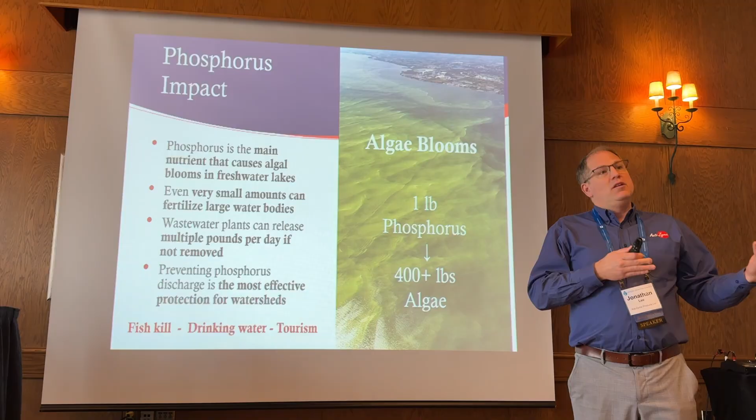Why this is such a big deal is that phosphorus doesn't gas off like nitrogen, right? It's a macronutrient, meaning it just stays — it does not easily break down. That's why most wastewater plants have major issues with disposing of it, and that's why the limits on them are so low, because we don't want phosphorus entering the waterways.

So these are the limits, the regulatory requirements, milligrams per liter across the country. The interesting part here — I'll talk more about Alberta — but you can see it ranges. Manitoba has the strictest requirement, and almost every single system in Manitoba has a requirement as part of their permit to remove phosphorus.

But in Alberta, there's actually only about 40 sites that have phosphorus limits. They're looking to increase that, and more so they're focusing in on very targeted areas where the watersheds are really critical, where the addition of phosphorus will make a huge impact. So they're going to start there, but they're going to be expanding, and I can see in the next 5 or 10 years everybody having one, because in Manitoba, Ontario, BC — everybody's got one.

Saskatchewan is in a similar boat as Alberta — there's just a few sites that have it. I think it's just taking time to get to the central part of Canada, because all those other areas are all connected to major lakes, major bodies of water. Eventually it'll come here and we're going to have to find a solution.

Because as you'll see here, biological and chemical methods are not the best way to go about it. Biologically, you need living organisms — that's actually where Acti-Zyme is primarily in, biological treatment. So we know the weaknesses and the strengths.

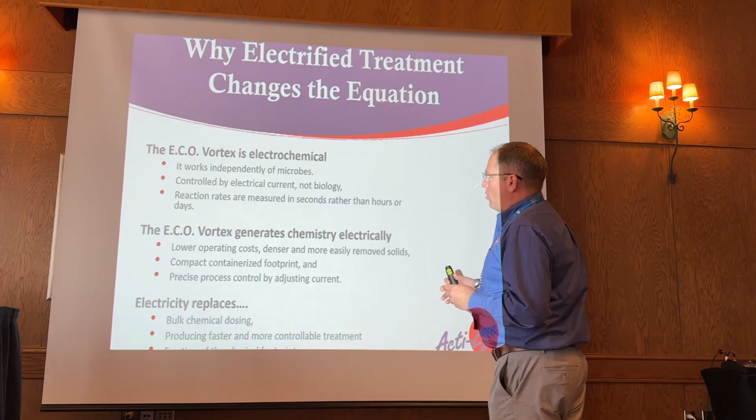E.C.O. stands for electrical chemical oxidization. There are three main parts to this: first, the coagulation part. What happens is it requires electricity, and that electricity then reacts within our cells, which I'll show you a video of in a second.

When it's in those cells, it releases ions that are able to bind. You get faster reaction times, within minutes and seconds rather than biological lengths of time. It's also not sensitive like biology - biological processes are quite sensitive to temperature and other conditions like alkalinity. That's why it's able to have the benefits without the limitations of biology.

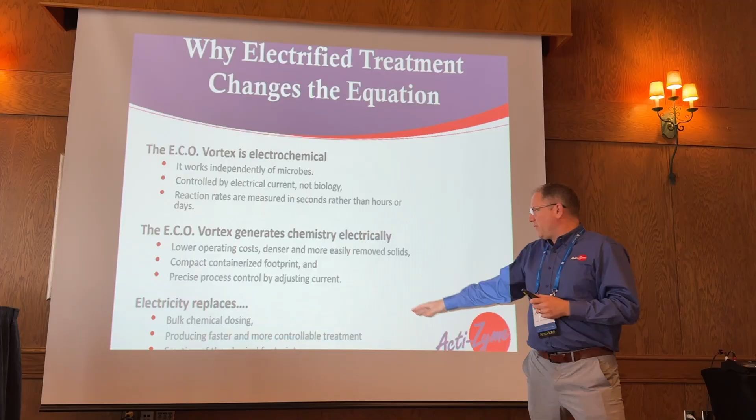The whole point is to lower operating costs and not be reliant on chemicals. Right? We normally put things like this into the chemical category, but it's a natural process. We're all focused on natural methods to remove and solve wastewater treatment problems without major costs - essentially the electricity replaces the bulk usage of chemicals.

We can design systems that can handle not just phosphorus and ammonia, but all sorts of other things as well. This is just the first target because phosphorus is so prevalent and everywhere. We're going to be looking to expand to other metals and other things in different areas, like manganese, but phosphorus is the main one we're focusing on for now.

Our whole grant, our whole process started about a year and a bit ago. We started contacting Alberta Innovates, and they were able to grant us some funds for this project. That happened in September. The whole length of the project is 12 months, and the first few months were the development of the system.

We custom designed our complete whole system, but we've been doing the research for many years to try and do this. We had a pilot at the beginning, a really small scale one, and now we're at a full scale system. That's the first part, the 12-month process.

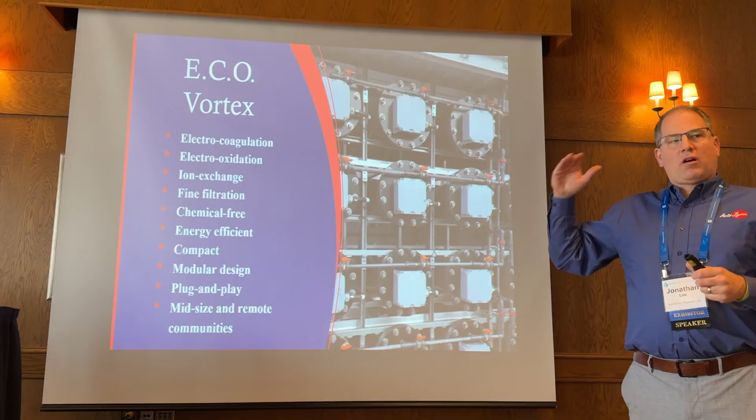This is a little short, about 30 seconds, just a quick tour so you can see what it looks like.

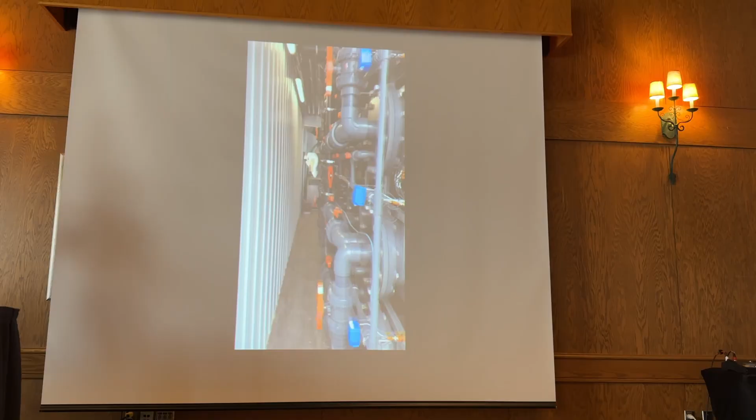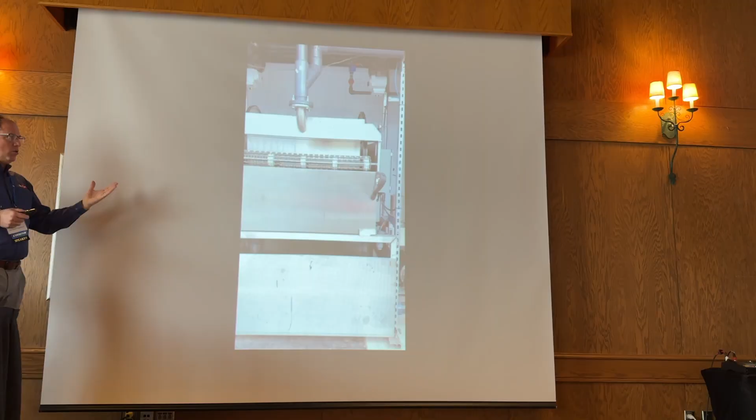So the front of the control panel. In here are 24 cells across two different phases of electrical cells, along with all of our rectifiers, control panel, and breakers. Those are all the different 12 cells. And this is the opposite side where the electrical side ties into all the anodes and cathodes in every single one. Then we have two micron filtration systems that strip out everything that goes in beforehand, as well as where the reaction takes place. And it all fits within a 40-foot container.

So phase one is the most important, which is the electrical coagulation. We have an electrical current that goes from our rectifiers into each individual cell. It goes through the metals, reacts with them, releases ions, and creates those flocks.

Then those flocks bind with the phosphorus, developing an insoluble phosphorus solid called pin flocs, tiny things that can then be filtered. That process is way more efficient at removing phosphorus, and as far as volume, it's about 80% less chemical usage than alum. The amount of sludge produced is minimal compared to any other process, and it's more efficient because it produces the same type of effect that polymers would create, but without chemicals.

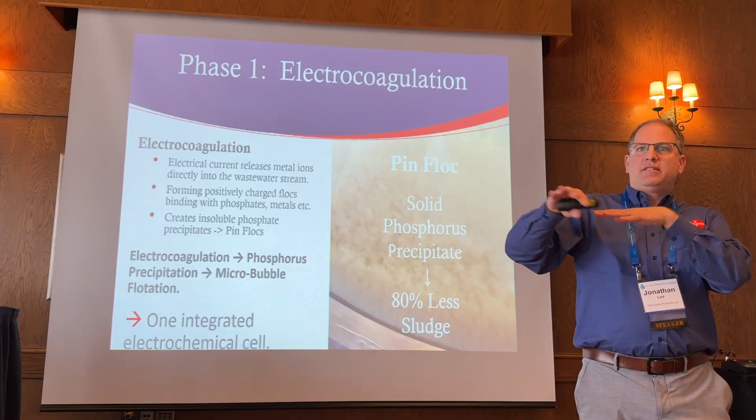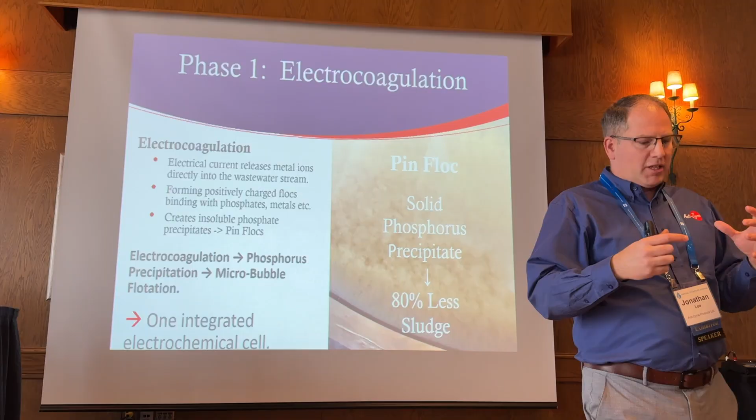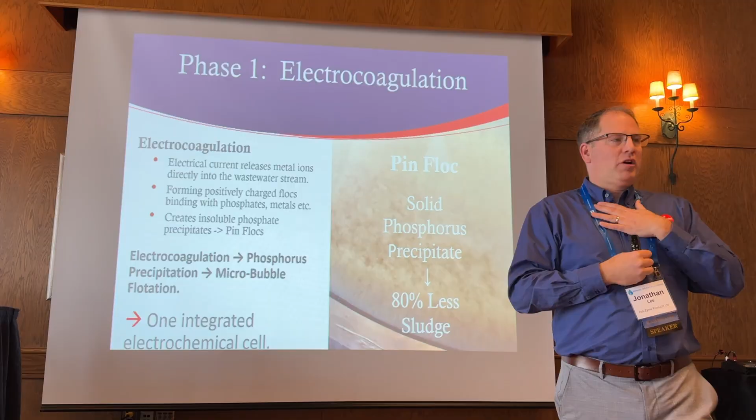We're actually creating it in situ inside of every one of the Vortex cells. All of this is done through it. Then at the end, as these electrodes function, they also produce micro bubbles releasing oxygen and hydrogen, which move the process along and carry those particles and flocs attached to the phosphorus out through the system for filtration.

The second process, the other 12 cells, is electrical oxidization. This is where we generate reactive oxidizing agents to break down and destroy organics, as well as E. coli and other harmful pathogens. It goes through these pipes, through the process, and actually creates hydrogen peroxide naturally in the system, basically cleaning and sanitizing the water after the first process.

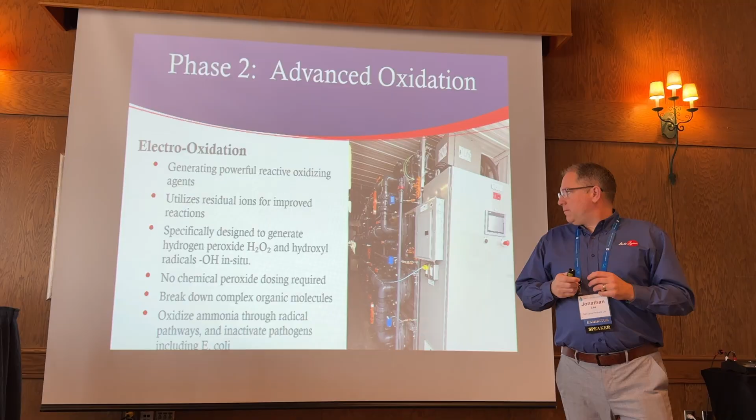There are no reagents added, so you don't have to add any kind of peroxide to it. It's created through our custom designed anodes that we've developed. And with these oxidizing agents, it reacts with nitrogen and is able to reduce it. Those are the two main processes.

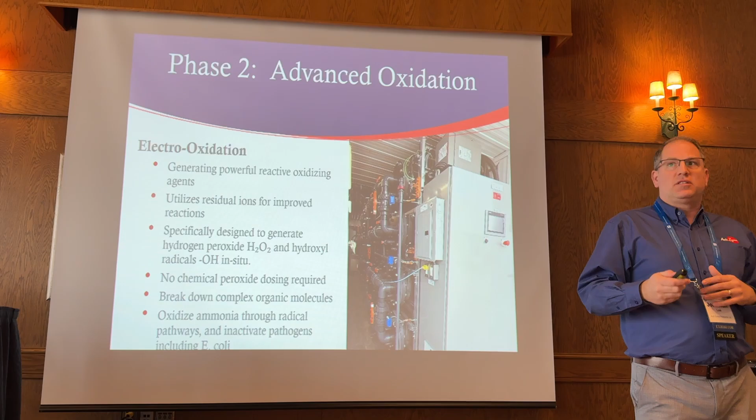In between those are all the filtration steps. We send the water through the first filtration to remove 2 microns of everything, so before it even hits the system, it's already pretty cleaned up. After the electrocoagulation process, it goes through the same filter again to remove as much phosphorus as possible. From there, it goes to the second process for oxidization and sanitation of the water, and final oxidization of the ammonia and BOD. Then it goes to the last filtration step, where remaining TSS and any phosphorus not removed earlier is taken out at the very end.

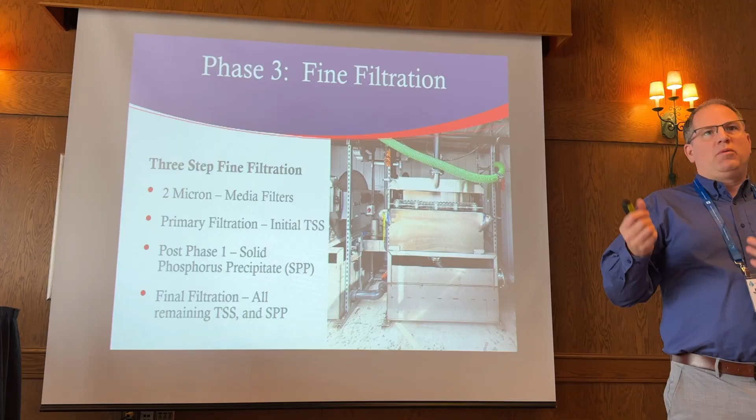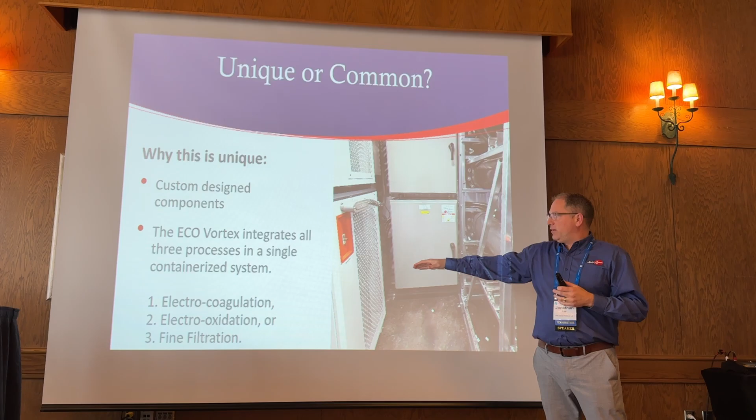So why is this unique, or why would someone consider looking at this? Nothing else out there actually exists like this. This brings multiple different technologies together within a very compact process. It's compact, able to produce all three of the main things: electrocoagulation, electrical oxidization, and fine filtration, all within a 40-foot shipping container, which hasn't ever been done before. It's all because of the specifically designed components we've developed that are able to react with electricity and provide the solution we want.

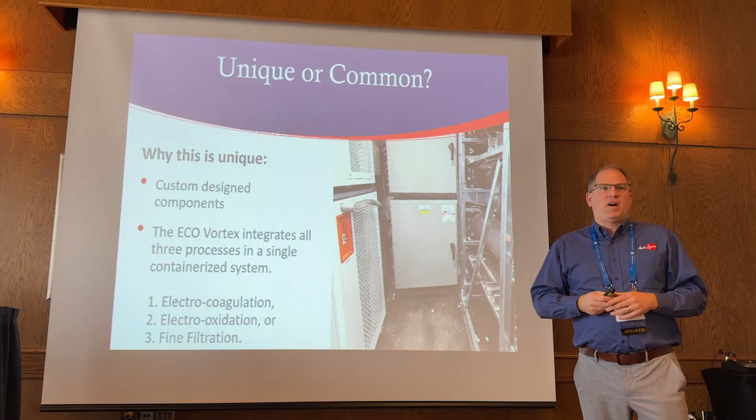So we went through and developed a comparison of all the other technologies or methods of dealing with phosphorus, right? You have your lagoons, your enhanced biological phosphorus removal, and then your membrane bioreactors - those are the main ones on the market.

And as you can see here, the cost is actually right in line as one of the cheaper alternatives. This is over a 10-year life cycle and per cubic meter, so it's a very fair comparison when you break it down that way.

But even with that aside, when you move on to the next things, this footprint is really small. This can be added to any process in any system when it wants that final polishing process to remove phosphorus and the last bit of organics and ammonia.

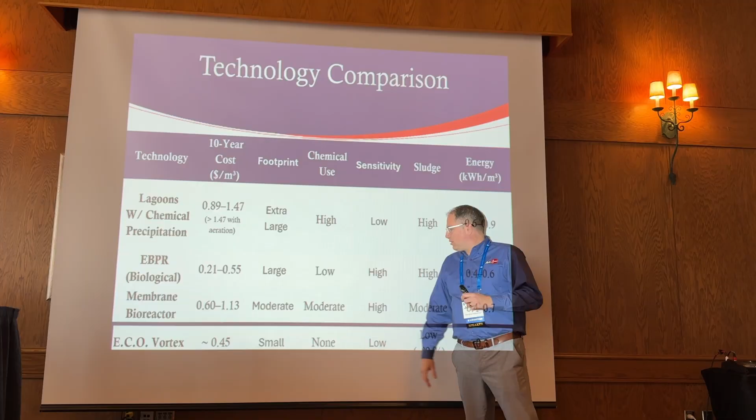No chemical usage. It's actually also not sensitive - you don't need to be as careful as with biology in the reactors or lagoons. This happens directly, so it could be cold weather or warm weather. It's all electrically controlled through current rather than biological activity.

The sludge, as I already mentioned, is the lowest of all of them. And we already know how difficult it is to remove sludge - all the permitting, disposal, transportation is dropped down significantly so you don't have to do as much with sludge.

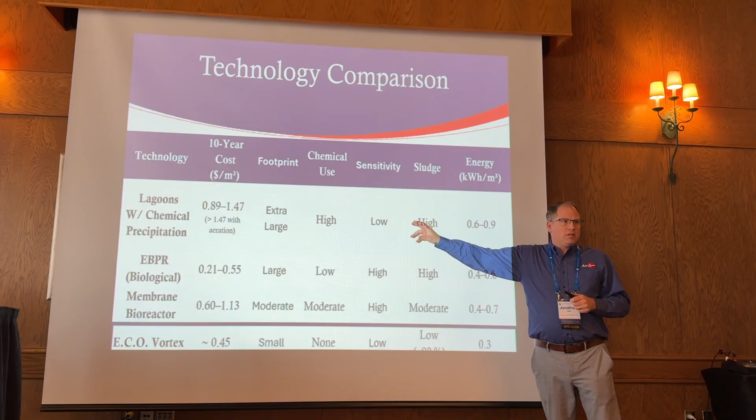And then at the end is the energy consumption. In lagoons, you don't normally think of energy consumption, but that's based on aeration, as most lagoons are required to have aeration in other provinces. Alberta doesn't have a major requirement, but BC makes it mandatory. More and more are saying you have to add aeration to your system if you don't currently have it - when your permits renew, that's often a large recommendation. So when you compare it against that, it's still cheaper than aeration, but then it oxidizes the water and strips out phosphorus and ammonia more efficiently than aeration would, as well as adding all the chemicals to do it.

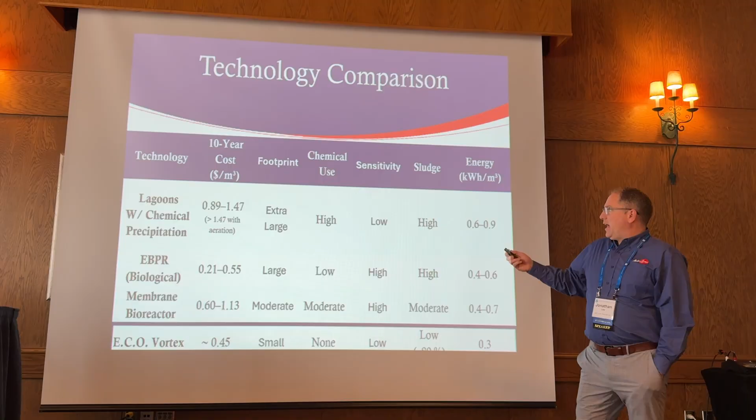So as a use case, the process has to be located after some kind of primary settling, right? The system's not designed to take on all the heavy sludge at the very beginning - that would be too difficult to handle. So you put it right after, like if you have a lagoon system, after anaerobic cells, or if it's a wastewater plant, after the first primary clarifier where the original solids are stripped out. This can then handle the rest.

Or it could be done at the very end of a process to discharge through, or recirculated at the very last cell just to strip out phosphorus completely.

And these are some of the expected performances based on the results we've had so far. So what we've done, like I said earlier, is had smaller versions of these to do some different prototyping, and that prototyping has allowed us to get better and better results.

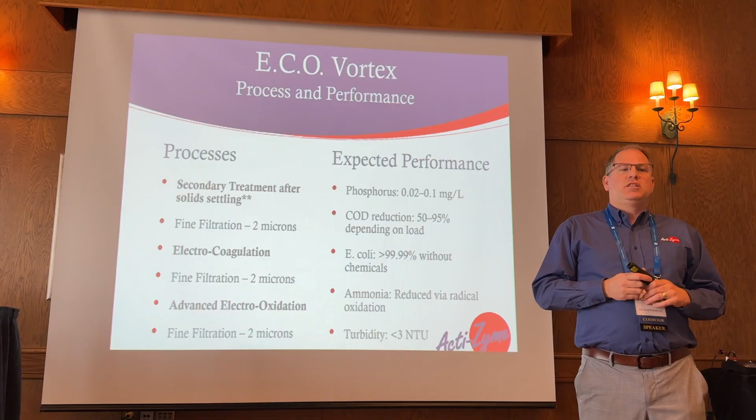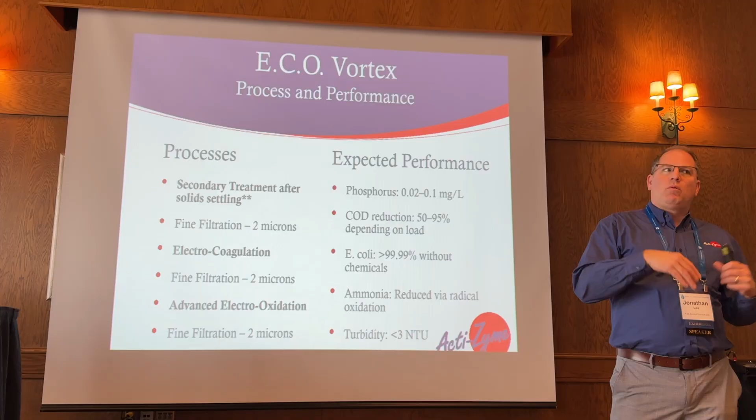So the impacts on water are pretty self-evident. If you can remove phosphorus at a high percentage level, then you won't have algae - if there is no phosphorus, there are no algae outbreaks. So we can remove it. If it just sits there and runs consistently at the end of one cell and recirculates the water through, it will eventually take all the phosphorus out over time.

Reducing chemicals, right? I'm of the opinion, always have been, that we want nature to be natural. We don't want to keep adding non-natural, non-biological things into the environment. And we want to be able to do so without impacting the quality of water we have. We have some of the best water in the world in Canada, so we want to make sure we maintain it as best as we can. Be good stewards of our water.

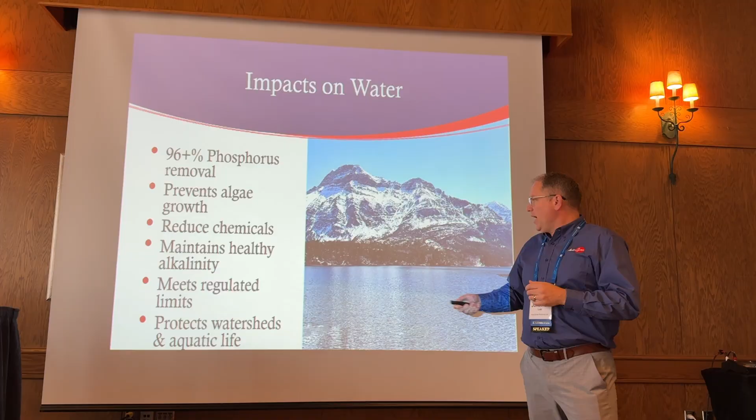It maintains a healthy alkalinity, right? This will meet all regulatory requirements. And then it will obviously protect our watersheds.

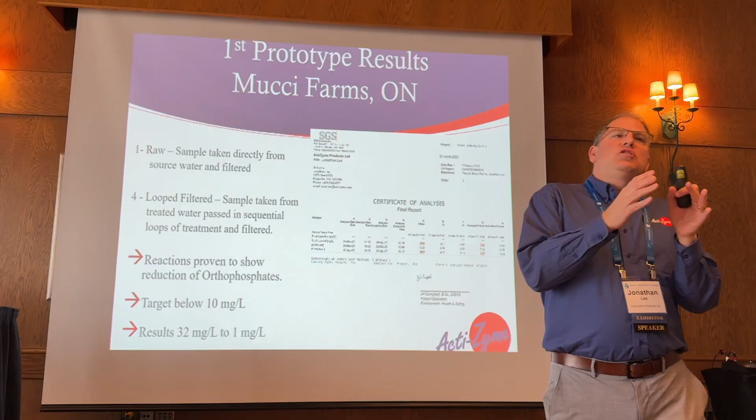So here's some actual data. This is the data from a system that was a lot smaller, designed just to test out the process, to see that it could function. We went to a greenhouse because we thought greenhouses have a lot of phosphorus, and their phosphorus was at 32 milligrams per liter that they were discharging. The city said they didn't want us discharging 32 — they wanted us under 10, crazy enough, because even though it was concentrated, it wasn't massive volumes compared to the whole city. But they still wanted it under 10. So I'm like, man, we can hit that mark, we can get underneath 10.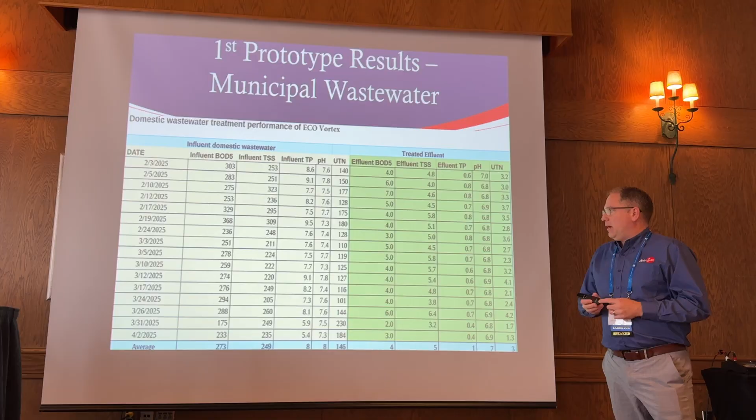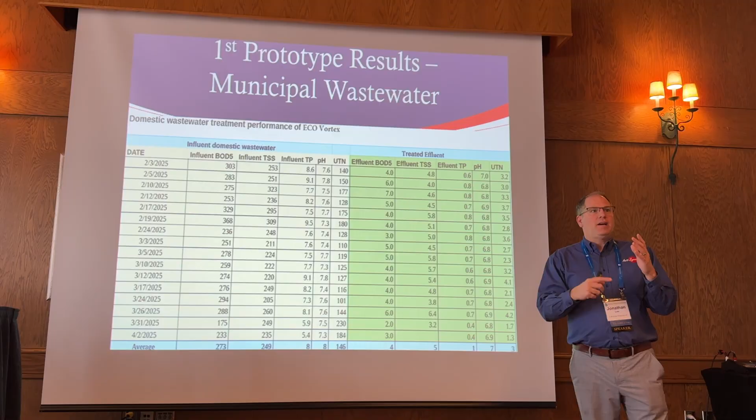So this was like a first prototype, where we took even stronger wastewater, more municipal raw wastewater, and took it through about a 2-month period of before and after with influent and effluent. This is again after that first primary settling, so right after the first pass it still had significant BOD and TSS, and we were able to get really extremely good numbers through just one pass through our system. If we wanted even better results, you could repass again. So we've been able to optimize this, automate it, and control recirculation so we can adjust how many times it needs to pass through to hit the treatment goal we want.

So what are the byproducts? What does this produce? That's one of the big things — we want to know what other impacts it makes. The two main byproducts: one is the phosphorus. This is the rolled media that comes out of our system. It's not a fixed filter — with fixed filters there's backwash, and you have to deal with that backwash which has all the phosphorus in it. So we developed a system with rolled media that comes out, and all the phosphorus, ammonia, and TSS end up on this.

So that has to be discharged or sent to the landfill as garbage. But we're already working to develop a new filter that's fully organic, so it can be composted and beneficially reused, because this is going to be really high in nutrients. That's not our main priority right now — we know it's a really good extra benefit we can pursue, but my main focus is just on removing it. So this goes to landfill for now, until we develop a filter that can do that.

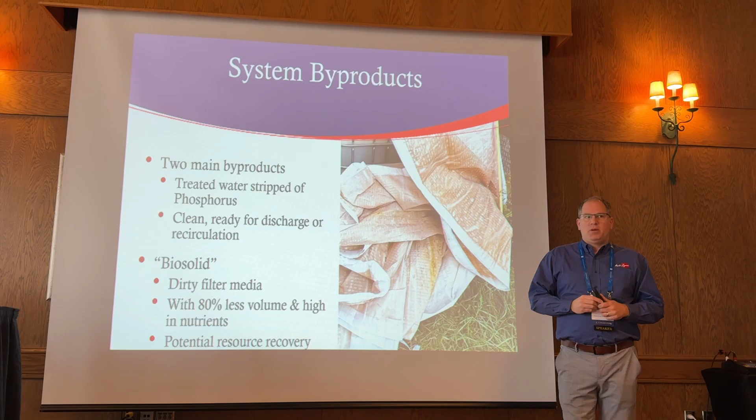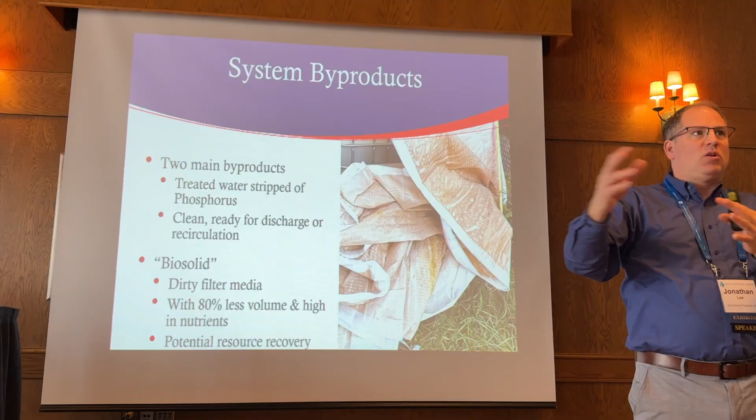And then obviously the other byproduct is the water coming out. As it comes in, we filter it and it goes through the process. As it goes out, it's treated. And the only other discharge is the paper that's just put in the garbage and disposal.

I just want to show you our steps of how we changed. One of the biggest problems is trying to take an idea and make it into reality, trying to convert something that might work at a small scale in a lab to actually full scale. The learning is crazy, and the hurdles and blockages are innumerable. I get one every single day. I just talked to someone I'm working with, and he called me right before this. I'm like, guess what? So one more thing to learn from.

So we started earlier with lab scale stuff, then we went to around 300 cubic meters per day, and only around 3 milligrams per liter. This is the one that's going to be used in our pilots here in Alberta. So I can do up to 1,000 cubic meters a day, with around 14.8 milligrams per liter.

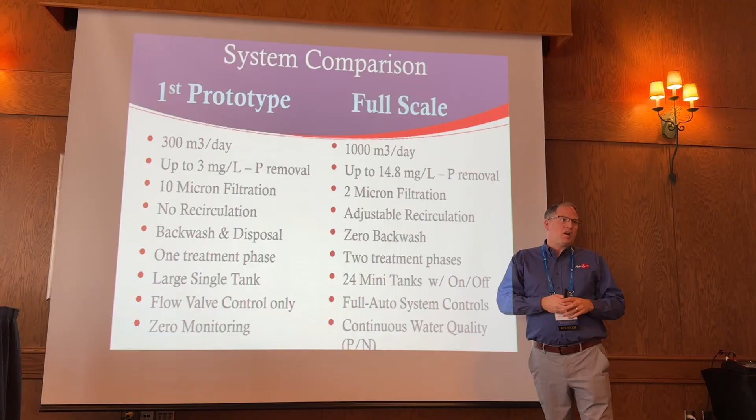And it's all fully automated. The previous one wasn't automated. Again, we don't want to put all the money in the first prototype, so we spent all the money on this one because now we've learned so much between the two.

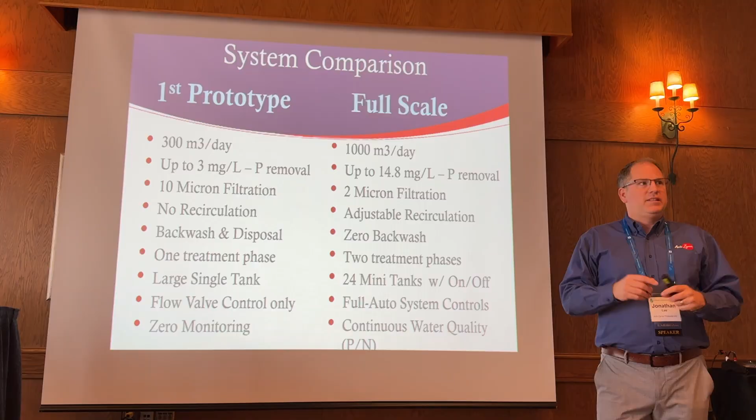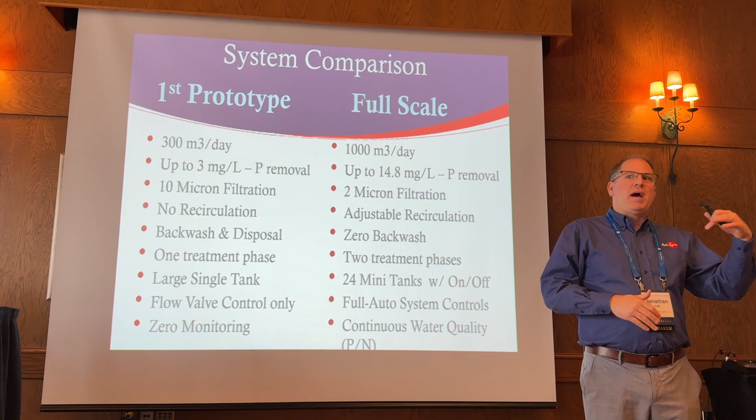So now we have those 24 mini Vortex tanks. Everything's fully automated. It's going to be sent to my laptop, all reported, all data, so I can optimize and change any parameter that I need to, so that we're able to maintain treatment or just experiment with it. What if I do this and that, and how do I max this out, so I can actually understand what could be done.

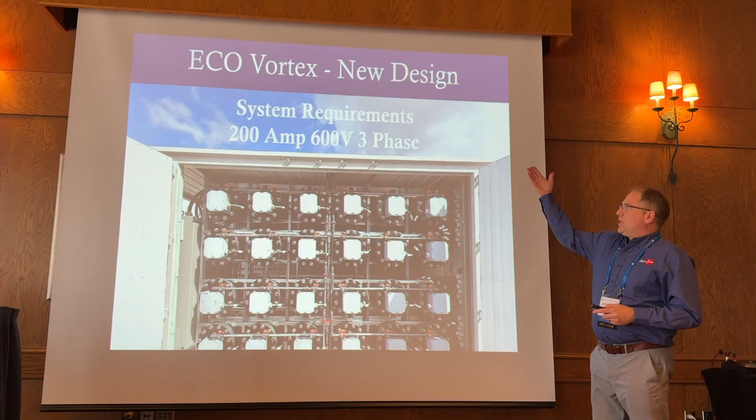There is an electrical requirement, and that's the max of what it is. Everything electrical has to be at least 30-25% above what you're actually even going to plan to use. So we're not using close to that, but that's how we're planning to receive the power.

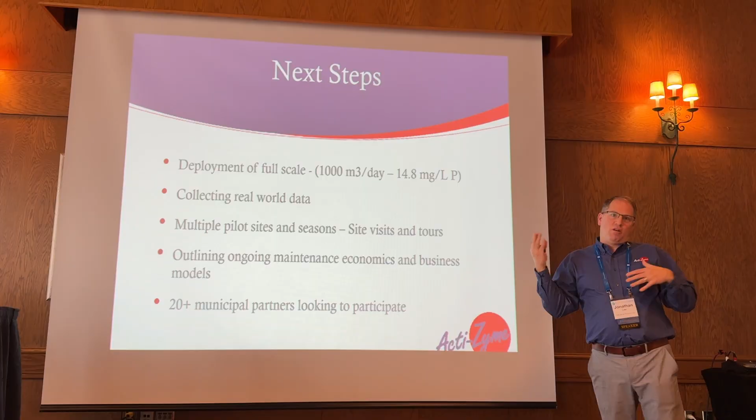Some of our next steps: full-scale deployment, which is coming in the next few months, collecting all the data humanly possible, and looking at multiple sites. If you know of a site that might be having issues with phosphorus, or has a permit, or is being told they have to do something, we want to try and prioritize those that have more urgency. We'd like to talk about that. Then we'll start looking at the ongoing maintenance of it, the ongoing cost of running and managing it. We have a pretty good idea, but real life is completely different than the lab, so we'll be working through that.